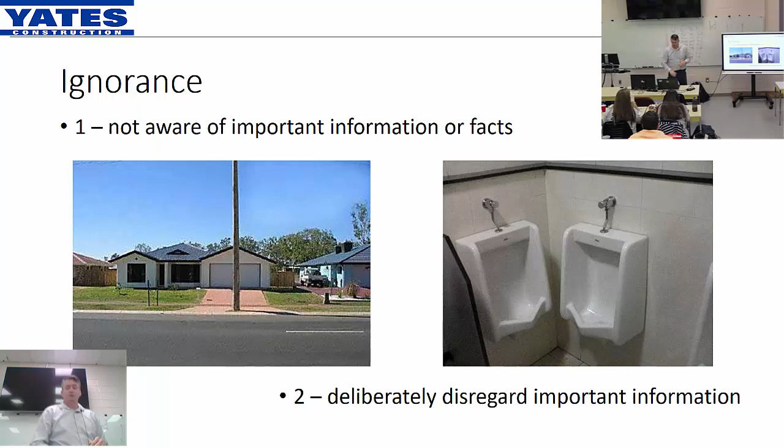Okay, let's go on to the next one. And if it's going to go, twice, alright.

We also have chaos. So what kind of confusion can we have? This simple one, this is a federal prison. Prisons have lots of bars on windows and lots of very strong doors and lots of concrete, things that you cannot break, and it works really, really well. So a little bit of confusion: you have a set of plans that show you a door, window, interior window combination. So then the question is, do the bars go on the inside or the outside of that room?

Anybody want to take a guess at what you think? Outside? So why would they go on the outside of the room? Once again, a little bit of ignorance. I doubt any of you have built a prison before.

So what are the rules? What are we supposed to use to make that decision? In this case, this room was a counselor's office where someone works with the inmates, helping them get ready to go back into society. Because that is where a civilian worker normally is, it is also considered a safe room. If something goes wrong, the door swings shut, it gets locked, and they can sit in there for 24 to 48 hours until the whole riot is taken care of. Bars on the outside is exactly what they want. Well, somebody else thought this was a place you were locking prisoners in, and if that was a room for a prisoner to stay in, then the bars would have been on the inside, like 95% of the rest of the rooms in the building.

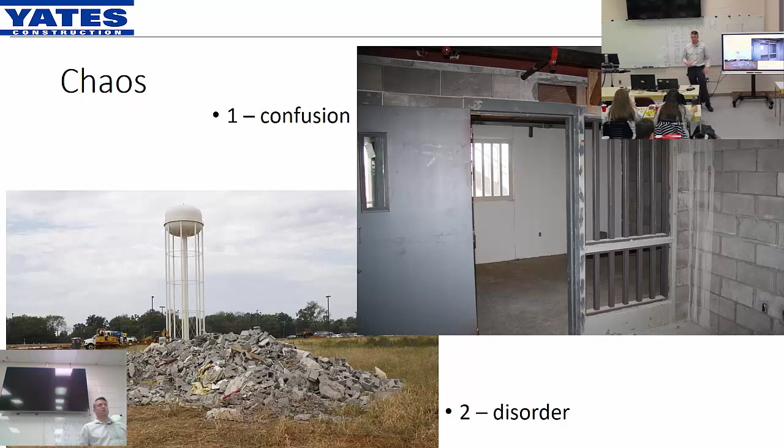It caused the confusion. And then there's general disorder when you end up with chaos on a project and things going on.

What we really want is order and understanding so we can do things like this. Think about that for a minute.

The other things were accidents, mistakes. Does a window get installed slanted like that by mistake? Any of you done any masonry work? That is a lot of very difficult cuts in brick to put that in.

This was somebody's very unique identifying thing they wanted to do with their project. Any of you ever been to Wonderworks? First you see the plans, you'd be like, they're upside down? Because the building's supposed to be upside down, right?

Same sort of thing here. The window is supposed to be tilted. But that takes order, that takes understanding, because we have to convey that information well enough that the mason doing the work doesn't walk up and say, oh, that's messed up, let me fix it. He wouldn't be fixing it, he would be deviating from the specifications.

This is the sort of organization that goes into the Jackson Federal Courthouse in Jackson, Mississippi. That was a 6,600-yard concrete pour. We had 4 concrete pumps, a solid 36 hours of continuous concrete going in place, and the order and organization that has to make that happen.

The biggest issue we had is one of the trucks, as he left the site, went to spin his drum to keep the concrete moving with a little leftover in there, turned the drum the wrong way and left a trail of concrete down the interstate. I still know where some of those piles are, because they didn't come completely off. But that was the biggest hitch, and it wasn't a big deal. We sent somebody behind him with a shovel, and he just scooped it in and cleaned it up. Everything else went nice and smooth.

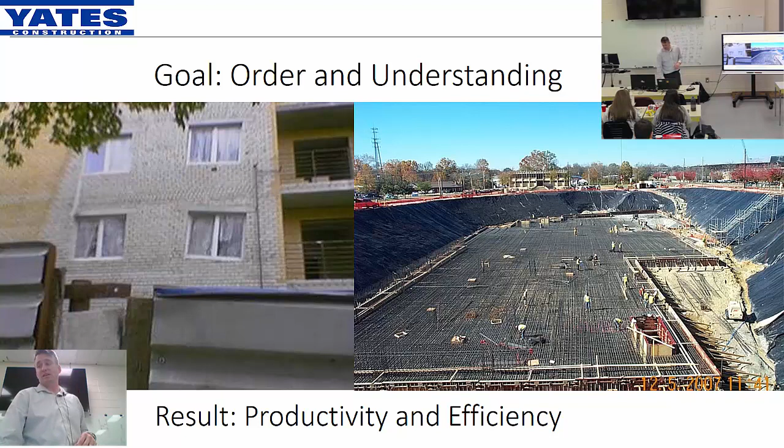So that's the sort of thing we're after on a project, and this is the sort of thing we're building. That's the courthouse, that's that facility. This is the outlet mall there in Pearl. Have you been there? That was a good project to work on as well, I enjoyed that one.

So the idea is BIM starts to build collaboration. Historically, within the design construction industry, this is the relationship everybody had. Architects, engineers, contractors, the owners, they all kind of fought against each other. The contracts were written to be opposing to each other. You're going to see that when you get out there.

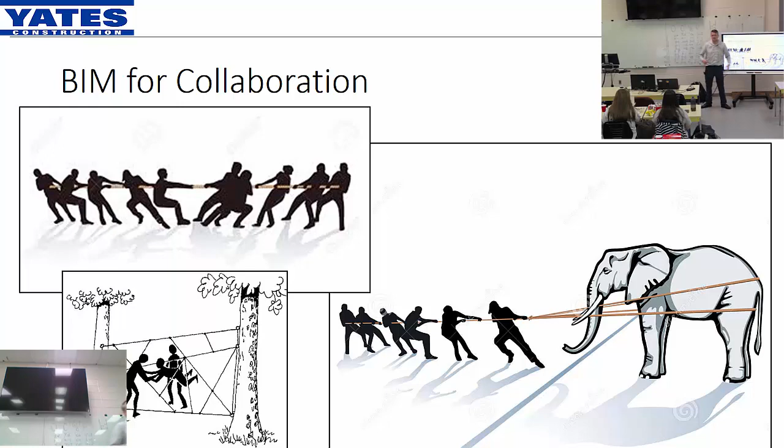One of the things I've done to fight that is whenever a contractor near me starts to tell an architect joke, I just tell them no, we don't need to build that relationship, we don't need to go that direction, we need to be coming together. And when architects start to tell contractor jokes, I say I'm a contractor too, right? Don't make fun of me. We ought to be moving the project, this idea of working together to make things happen.

With that in mind, the core premise behind BIM is: previously, you would do a concept design, and this is what a lot of you are doing in architectural classes now. Then that design would go out, and you'd get plumbing and electrical shop drawings, architectural design, structural shop drawings, and all those things would be created in order to work out the details of building this building, all the sort of things it takes to make sure it really happens.

But the first time it would come together was when it was actually built. That was your first real chance, although you could overlay sheets, right? You could even overlay in CAD, which is the next thing we did to try to make sure it worked, but none of that gave you a true representation.

With BIM, we are actually building that composite model. And that's part of the difference between BIM and virtual design and construction. BIM is the act of creating the model, that's what the software does for you. Virtual design and construction are the steps that take place after that, how do we actually make all this happen.

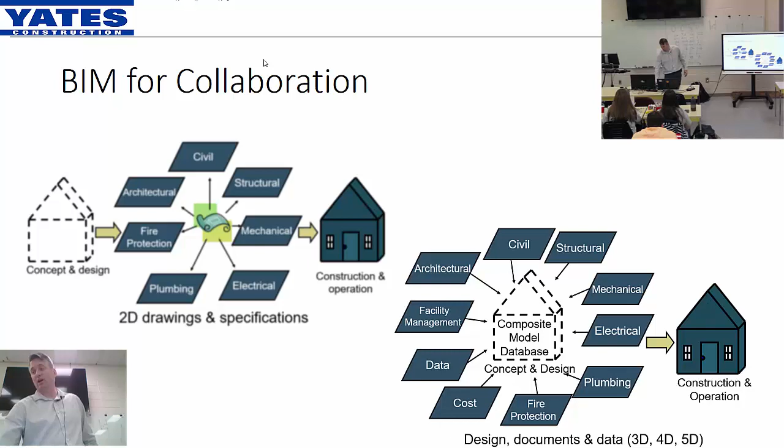If we look at the flow of construction and how it works, you're going to have some contract language that sets the tone for everything you do on your projects. How that contract is written, whether it's design-bid-build or integrated project delivery, makes a huge difference in what takes place on projects.

Then from there, at some point, there's going to be a schematic design, that rough sketch. Generally the principals of architectural firms that have built up their company—and I think all of them I've talked to—say that's what they really love about architecture: that highly creative part where they get to make the building have a feel and a life to it, be inviting and serve its purpose.

This is a lot of work and is very difficult, not easy to do. And to be able to hold that design and that feel as you go, especially when you have an owner who starts saying, 'I've had to cut my budget because of this or that,' it gets very difficult. So you try to maintain that.

Then we roll into the shop drawing and fabrication phase, where the shop drawings have to maintain the design and the engineering. They can't change the requirements that are there. But what they have to do is figure out which pieces and parts they have to put together to make that requirement happen. That's the phase they're in.

And then the most important part is actually getting it all assembled—workers, men and women going out there actually laying a block, or installing conduit like that electrical box back there, or coming in afterwards and putting in a camera mounted up on the back of the room. All of that work—how do we convey all this information through this process to them?

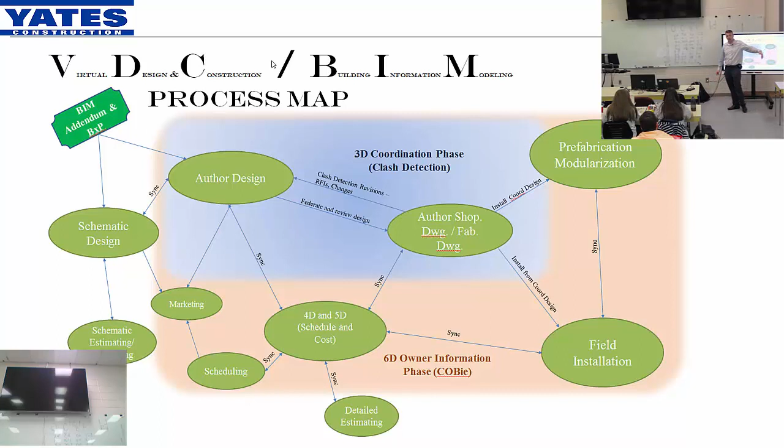And you also have the idea of what takes place in operations. So have any of you taken any LEED classes and explored leadership in energy and environmental design? That's something that focuses on the long-term use of the building and the cost payback there, because if you can reduce the cost of operating, maintaining, and using a building, that allows you more funds up front to improve the building.

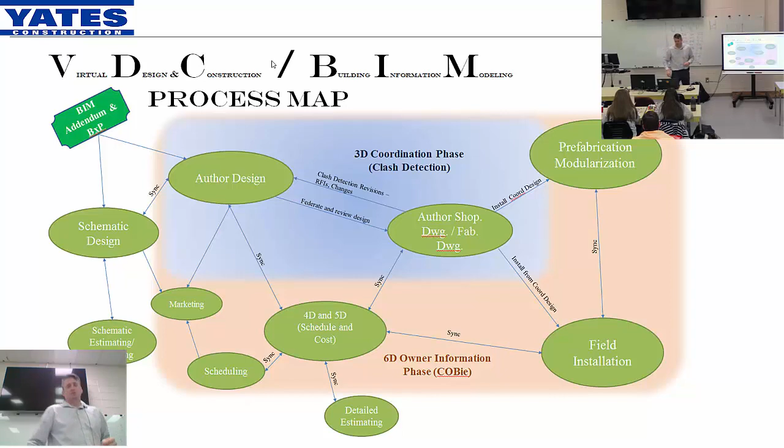So those are the sort of things we're looking at and doing. I'm going to skip a couple. These are two projects we're currently working on. One of those is much more expensive than the other. Want to guess which one's more expensive?

So what makes you think that's more expensive? The shape is very custom, right? It's unique, it's special. But if you start designing architecturally, think about when you do a hotel like this—how many levels do you design here? One or two. What are you going to do there? 42. Right? They're all going to be completely unique and completely different, because even though the dimensions might be the same side to side as this one up here, that's the sort of thing that's allowed.

So what's interesting about these projects is that the design team on neither of these projects is using any elements of BIM or virtual design, and they are having a very rough time.

So why would someone not do that? Well, both firms use BIM and do it all, but both of these projects have been in the works, trying to be built, for like 15 and 20 years—they've been somebody's dream for that long. All of the work was previously done using the greatest technology at the time, which was CAD. But now when it's time to build it, that conversion and rollover doesn't work very well, and it doesn't click. So sometimes even very large projects don't use BIM.

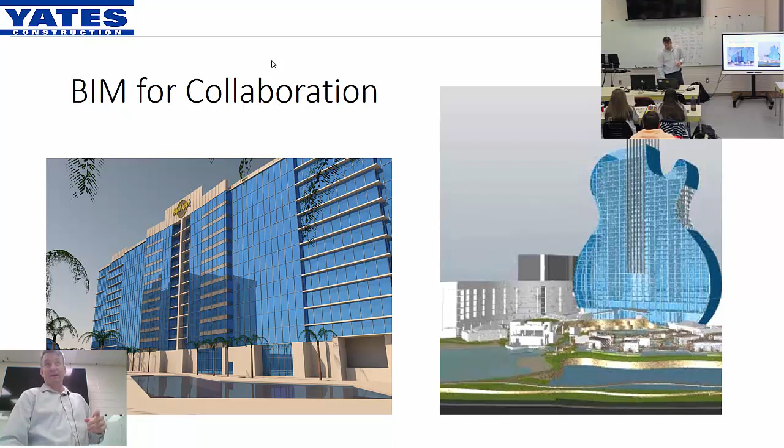So hopefully I answered your question and your question. Let's keep cruising through. Here's an example of something that we do with BIM to avoid ignorance and chaos. This is the Bloomfield Outlet Mall that you saw a picture of earlier, and many of you have probably visited.

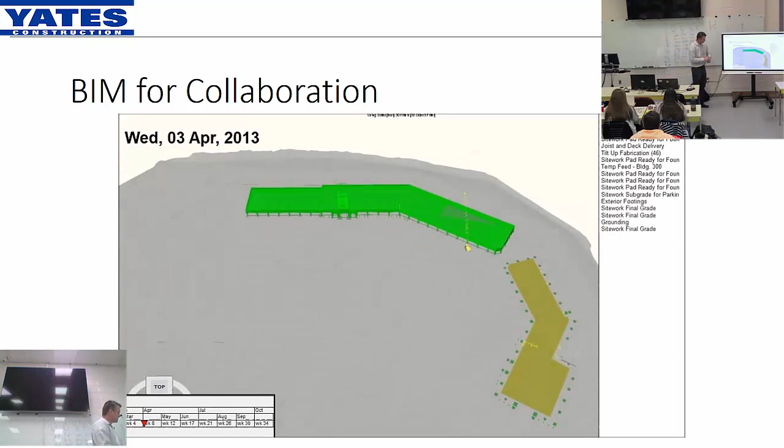This is a 4D schedule. We have taken the elements of the model and tied them in a program called Synchro to the actual construction schedule. You can see the list of activities on the side, and you can see as it's going through, all that stuff is happening and going by really quick. I forgot that I sped this one up, so I talked too long.

Right there it is, okay, right here. Some of you in the back might not be able to see, but we actually saw the project building. I've taken the elements from the models, tied them to the schedule, and now we can actually see the schedule. It's like having a crystal ball.

It's amazing. So I take this crystal ball and I go show it to the superintendent and say, hey, look, I built the schedule. We have this. This was the first one I really did, some like 7 years ago. It would have been April—it would have been 7 years and 2 weeks ago.

And I got all that put together, showed it to the superintendent, and he says, Crosby, you're on schedule, and your BIM stuff is all useless. This is all stupid, this is dumb. There's no way we're going to have 5 cranes on this project. Take all your stuff back and redo it. Okay, thank you, I appreciate your feedback.

As a side note, that's always the appropriate response to feedback you get from somebody, right? Whether they tell you you're an idiot or whatever it is, the appropriate response is thank you. Anyways, we'll get into that later, but thank you very much.

And I said, so what I was doing here, I feel as if we're going to need a crane to set these units. Oh, we're not going to need that big of a crane. Oh, okay, alright, I can change that. My bad, we're good to go there.

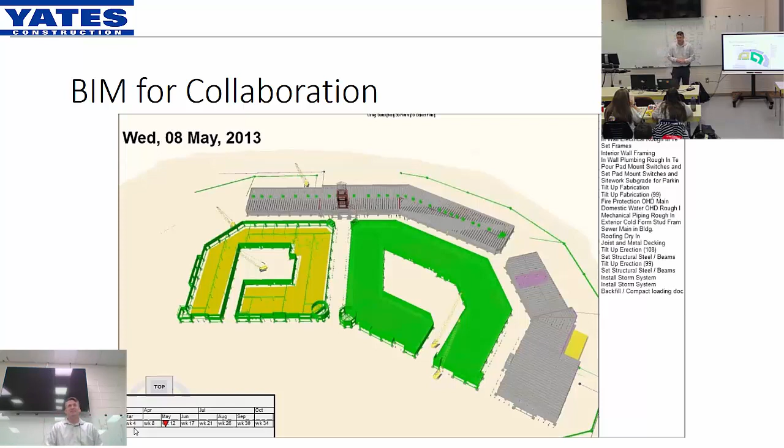What if we're building a new dorm for the university here? What if we built a new dorm for you guys? When does it have to be open? On August. If it's not open by August, what do we do? Somebody's paying to put a bunch of students in hotel rooms. And that's expensive, it might be nicer than the dorm, but anyways. So this is the sort of thing that we're looking at and doing.

Okay, so here's an example of a 4D schedule. This is also, we use the Oculus Rift and virtualization. And so we actually took our 4D schedule, I picked a spot in time, I picked the busiest day on this campus where we'll be building this project. On that busiest day, this road through here looks like an interstate. There is traffic back and forth both directions on that road all day, the entire day, all night. This facility is cranking away. And we're supposed to be building on their busiest day of the year without interrupting their typical business practices.

So this was a screenshot to walk them through that. We've added some safety icons that we help in our training and our orientation, so that way when they're looking at the schedule, they realize we're doing orientation, this is what we're going to be building. We're going to have to be worried about fall protection. We're going to have to be worried about overhead work. We're going to have to be worried about traveling underneath this where there's dirt going back and forth on a conveyor belt. All of those sort of things.

We're overcoming that ignorance and chaos by using visualization that you can see. That image itself was a very significant factor in us winning a very large contract in Tennessee. And so because that is an important scope of work to them.

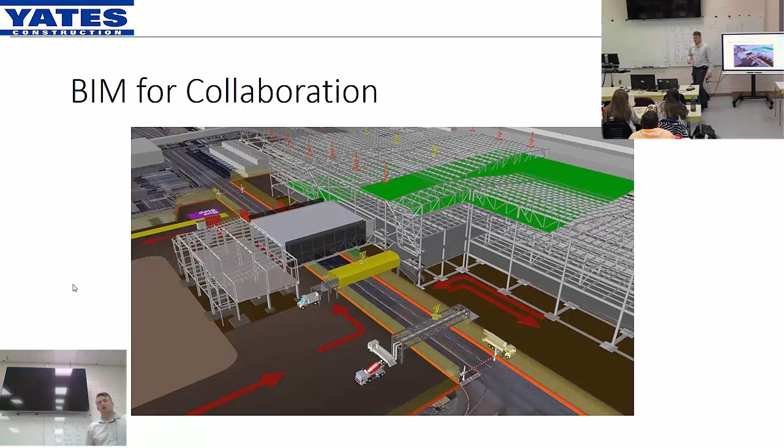And we walked them through the Oculus Rift. They were able to look at it, and they got on the Oculus Rift, and they looked at it, and they said, this isn't high enough. I said, what do you mean? This isn't a typical road, that being at 16 feet doesn't work. We run tower trucks past here that have to have 18 feet to get clear. Good, I want to know that now before someone drives a tower truck underneath it. Alright, and so those are the sort of things that we find and we do. Okay?

This is an example from a Mercedes plant where they build Mercedes Sprinter vans. Our shop drawings came in, and they had been modeling like they're supposed to—the coordination between the structural steel and the bar joist and the interior columns. The bar joist was providing some interior lightweight columns, and what we ended up with was a 7.5-inch difference between the two. We found that virtually before they made the steel order, before they did all that, saving the project 6 weeks of time.

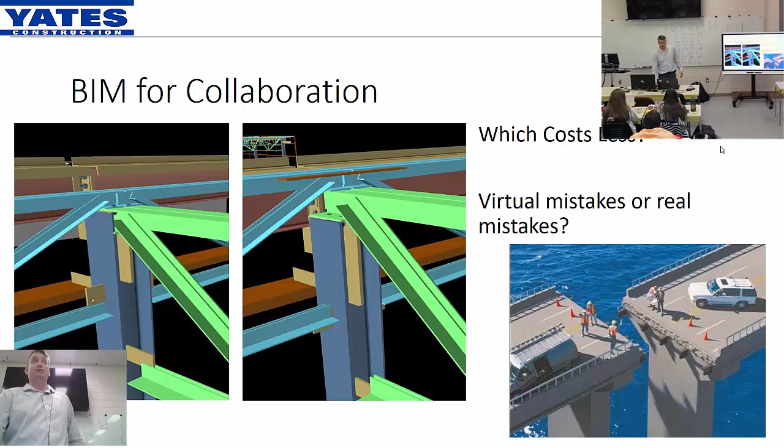Because is it better to find it here? Now, you got to know that's Photoshop. You got to know that never happened—for one thing, I know it never happened because you never have a span that close on two ends of anything, right? But it does get the convenience and the idea across of what can happen and does happen. I mean, I showed you those images at the beginning. That sort of stuff happens all the time.

So the idea is these whole teams have to work together to make this happen. Previously, our contracts have indicated that all of them would work separately and are generally at each other's throats through a project. Now we have to change that because all of these groups are now engaging in teamwork. Some people openly and readily accept that. Some people really don't like that idea. And so we just work with them and we help them through.

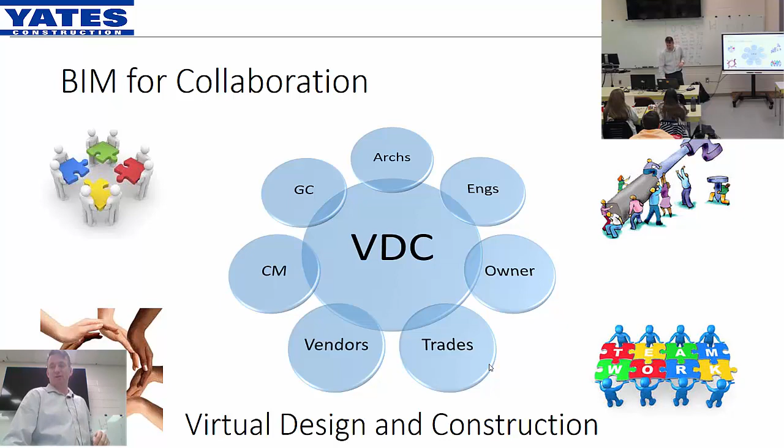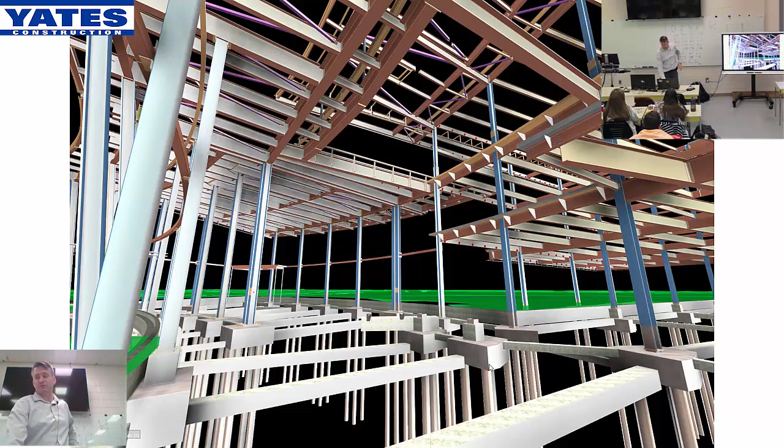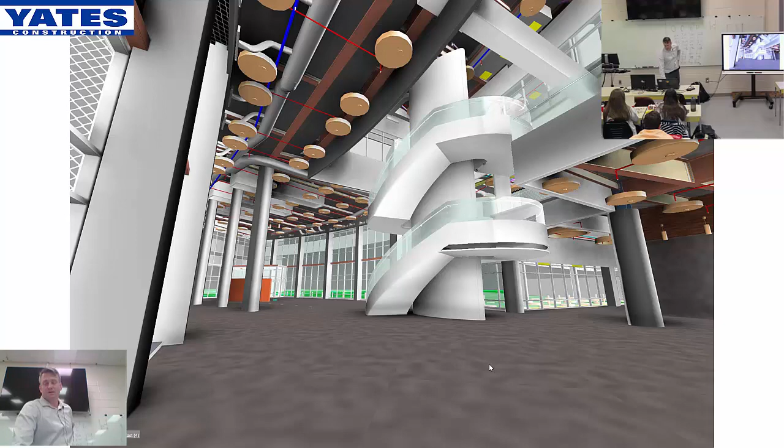Okay, concrete, not a big deal. Custom stair tower, different design. Miscellaneous metals, that's a different fabricator. Okay, our ductwork, fire sprinkler, lighting. Curtain wall, glass, glazing, electrical lighting again, finishes, laser scan.

Whoa, why would we laser scan where we're well into work? So we have a particular contractor that is going to make this tower through the stairs—this glowing tower of light that is absolutely amazing and wonderful to see. But they tell us that to put the fiberglass panels up, they have to have a tolerance of 1/64 of an inch.

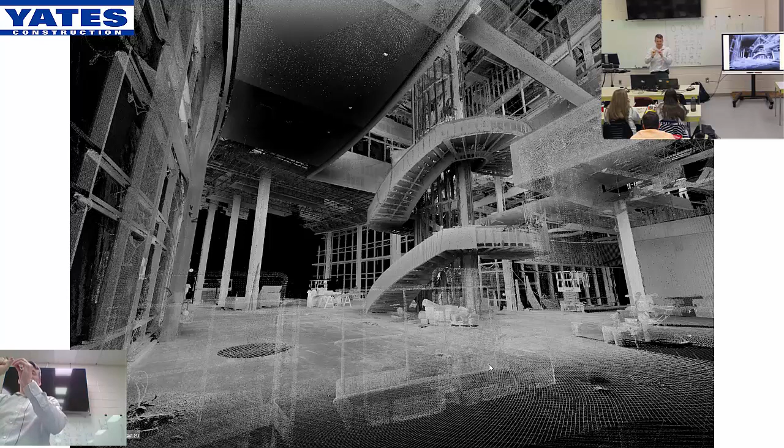Have your classes gotten into tolerances yet? How many of you have done work that know how big a 1/64 of an inch is? It's smaller than that, right? I mean, we're like fingernail, right? When you're doing construction, how do you typically mark where something goes? A tape measure and like a chalk? How big is a piece of chalk? How big a line does a piece of chalk make on the ground? Way bigger than a 1/64, right? How do you actually measure down to a 1/64?

So for one thing, man, that's crazy. But these are custom fiberglass panels—they have to wrap, they can't have any seams. All this stuff has to take place. So how do we get them their 1/64 of an inch? Well, we laser scan it, and we do a high density laser scan, because most laser scans would only get down to like 1/8.

Yes, sir, this is a laser scan of the physical construction on that day. You can see there's a lift there, a JLG lift. There's some boxes of supplies. This circle, that is one of the locations where the laser scanner sat on the ground, and it doesn't scan underneath itself, so it leaves a little hole. There's another one over there, there's another circle there—they're harder to see.

So it reads all around, and then we pull all these models together. It collects all the points from all the different angles, and you get this model that you can walk through, that is accurate down to a 64th of an inch. And we go back to that supplier and say, here is your model, here is how to measure, here is how to know exactly where every bolt hole on those studs are at.

They gave me this deer in headlights look. Red flags went up when they said, ooh, what do we do? I started asking questions and found out that they're fiberglass panels. They make them, get them out, and let them dry, laying them over some bins. I thought, that doesn't sound like 64th of an inch tolerance to me.

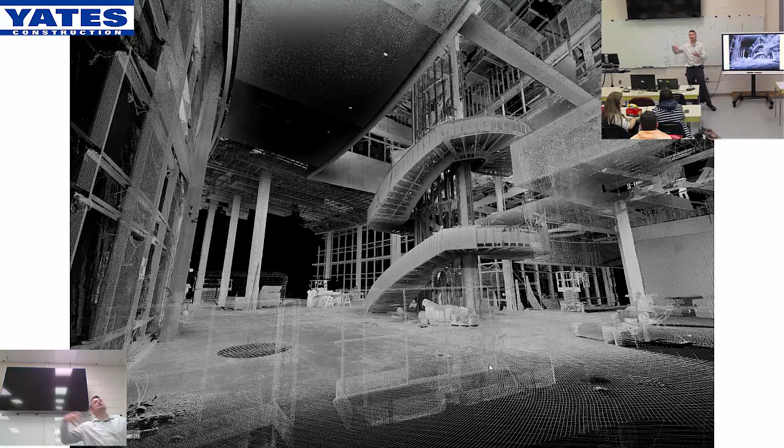What I found out is that those panels are fairly hard to make, but how this company had been doing it is they'd tell everybody a 64th of an inch tolerance. They'd bring their panels out, they didn't fit, they'd say you're out of tolerance, and make the owner pay to fix the panels. We provided a means so the owner did not pay to fix the panels. They had to make the panels, install them, and when they made a mistake, they paid for it. We saved the owner a lot of money. That was a good thing to have happen.

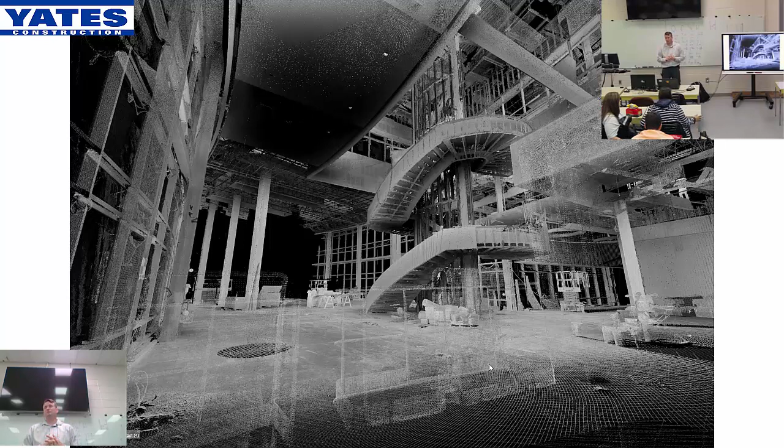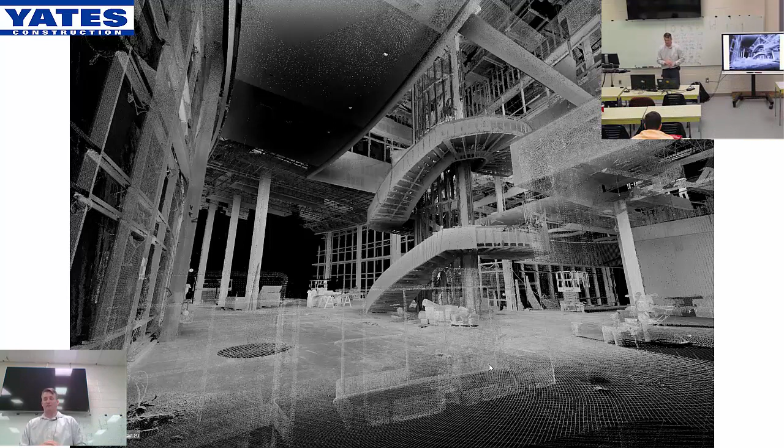For us, that contractor wasn't too pleased with the situation, but they'd been a little devious there, and that's not acceptable. We want people to do better work, be more productive, and do things right for the right reasons. So that's where BIM helped us a little bit.

That's the laser scan and the model. There you are, complete with some of the finishes. And then, of course, there's your tower of lights. It all ended up being quite nice, looking really neat.

The other thing about this that was a big deal, which we don't have the full story for, is that those were some of the first curved LED panels ever produced in the world. They had to do custom displays on them that wrap around the column, and they're pretty neat to see. They did that, and then like two years later, curved TVs suddenly became all the rage.

But anyways, it's really pretty neat. So that's the sort of idea we're talking about. Let's walk through how this happens and what makes BIM work. We start with an architectural design. How many of you have actually produced an architectural design? Okay, that's the starting point.

That's the dream, that's the vision for most projects. Unless it's industrial, like a processing building creating plastic or fiberglass, then nobody cares about the architecture—it's about the mechanics and other things. But anyways, it needs to be model-based, which I think all of you are familiar with since you're all in the classes doing that.

Then we have to do the civil. I've had five projects in the past year and a half where I went out and tried to virtually align the civil and architectural models to see how they sit together, and discovered that nobody knew how they matched up. What kind of consequences does that have in real life? Nobody knew where the building was supposed to go. You really ought to know that, especially before we pour the concrete, because we can't just move the concrete later.

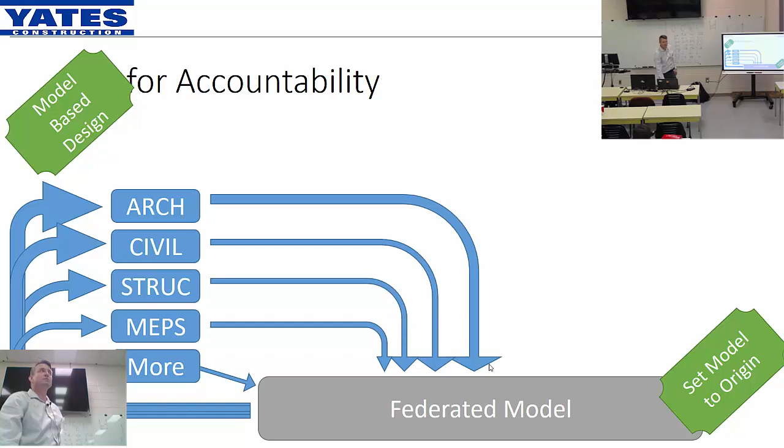Then our structural has to match, along with mechanical, electrical, plumbing, sprinkler systems, whatever else we're going to model—kitchen equipment, CCTV, furnishings. Those all produce the design requirements. They meet the code. They are what has to be built. Then we have to go into the process of how do we actually build it?

Because I'm pretty sure all of you that have created architectural models, did any of you bother to look at where the masonry brick actually sat, or where the block was? Did you look at this joint and say, oh, that's a half joint or a whole joint? What's going on there? Does it intertwine, or are these separate? Is that a control joint there? All of those sorts of things. Usually the architectural team isn't into that. Why not? It's a whole other level of expertise, a whole other career of how to actually make that work.

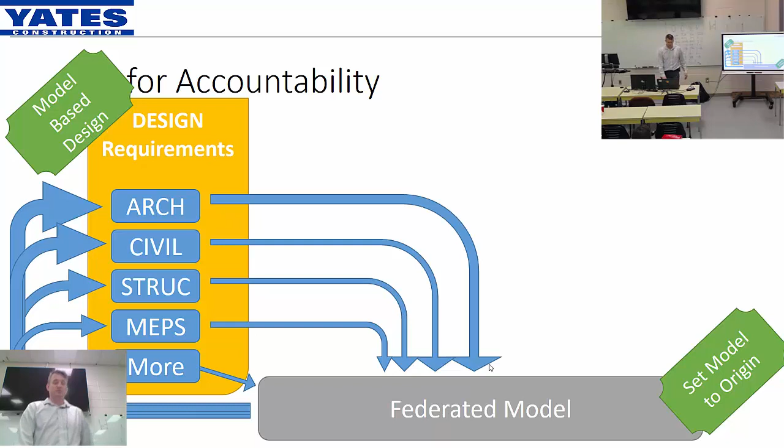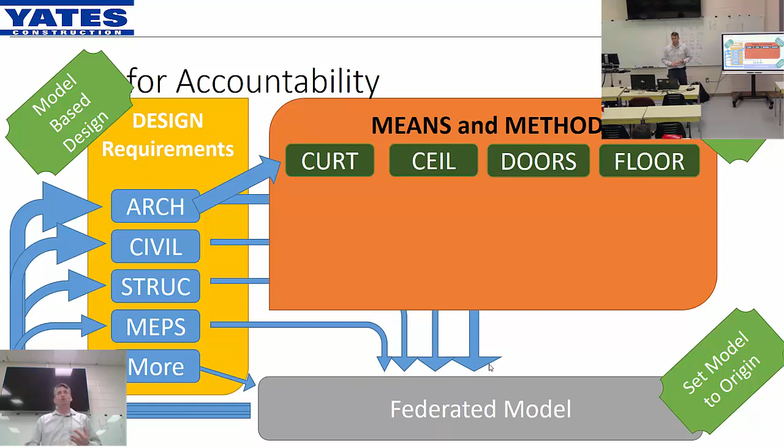So we need shop drawings. Those shop drawings are often referred to as means and methods. We start building those means and methods. We want model-based shop drawings, so now we can overlay these models on each other: architectural, curtain wall, ceiling, doors, flooring. Would we model the flooring in here? It's just paint, we don't really need to model it, right? What's a building where you've seen where you'd have to model the flooring?

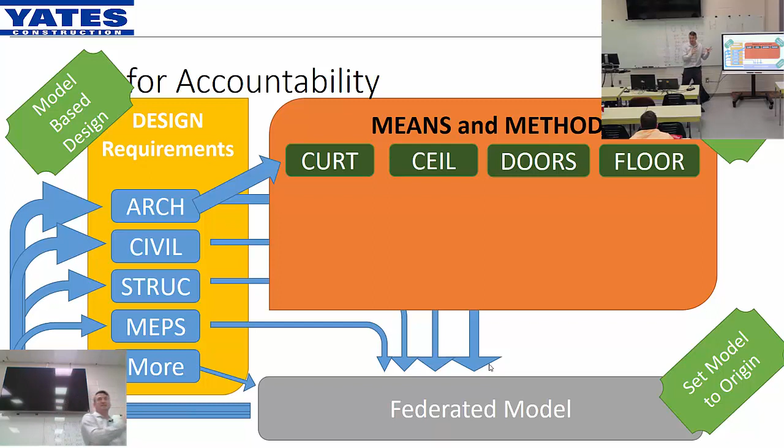A fancy tile floor, if it has a pattern to it, right? You walk into a building and maybe there's a big compass out there with north on it. It's embarrassing if that's not really pointed north, so you want to model it to make sure it works. Any of you visited a casino? Flooring patterns are very significant and important in a casino, right? That's how they keep you at the games, that the floor all points back to the roulette table.

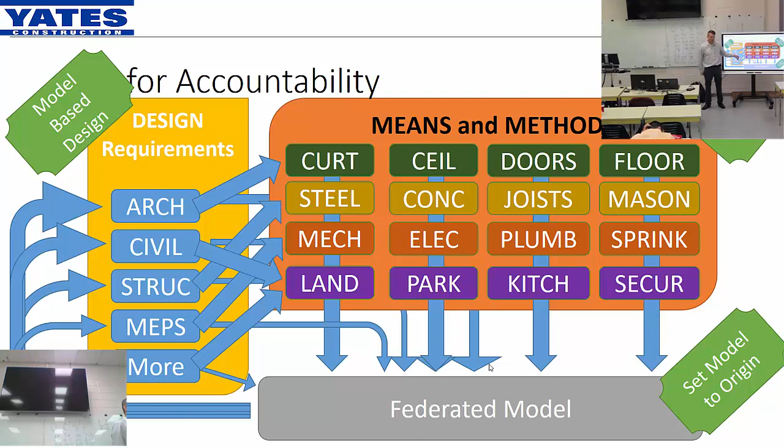Steel, concrete joist, masonry, mechanical, electrical, plumbing, sprinkler - the information is pulled, and you almost have to redo them, right? They can't just take these models because these models don't have the detail, they don't have the level of development that's needed when you get over into here. So all of that comes together and you start bringing them in. Every week you bring in what you have and start coordinating it, running it through this process, making sure it works. If it doesn't fit, you go back up and go through this process in this circle over and over again until you have it completely designed and worked out.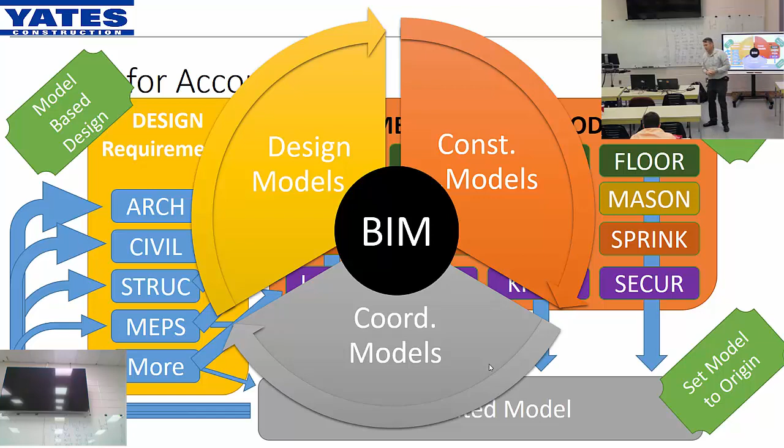With the whole intent that when someone walks out there to start installing things, they know it all fits, it all works, where it goes. Every one of those employees now out there building this building have freed up that much brain power to think about, is the quality of my work correct? Am I actually putting the tile right - not just is the arrow of my compass on the floor looking north, does it actually look good the way it's coming together? Is my conduit actually straight? You look at that electrical panel right back there - if he'd known everything was going to fit, would they have had those crossing over when they did it? No, they would not have. That's an exposed feature, it's there all the time. So there are things we can do that much better as we go through.

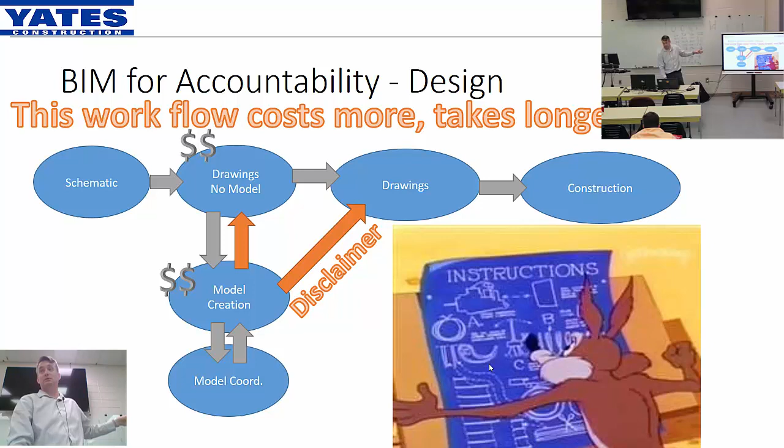So we are pretty much out of time. I walked through this process in the other class. If you do the process wrong, you get a plan about as good as Wile E. Coyote, okay? A little bit better you can do is minion level planning. What I'm after is Batman level planning - I want you to be able to keep the whole world safe through excellent planning. That's what we're after.

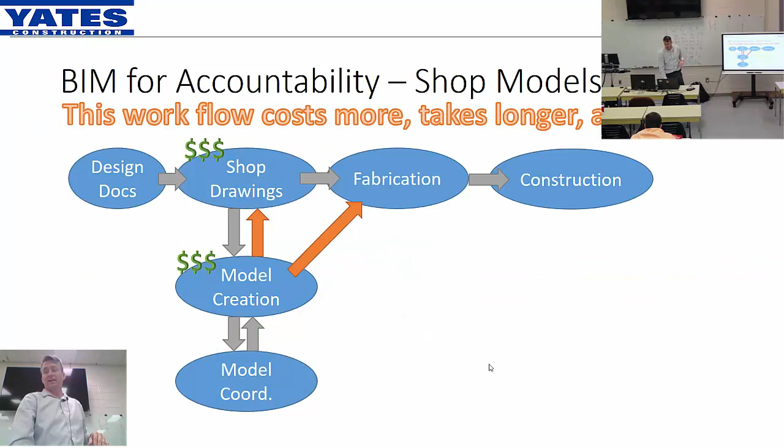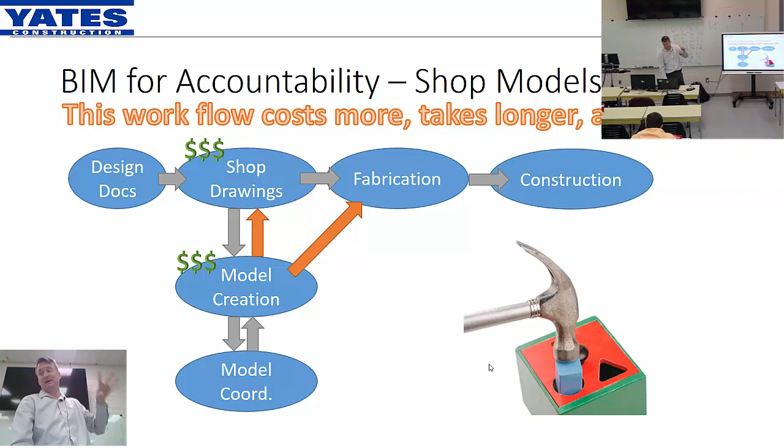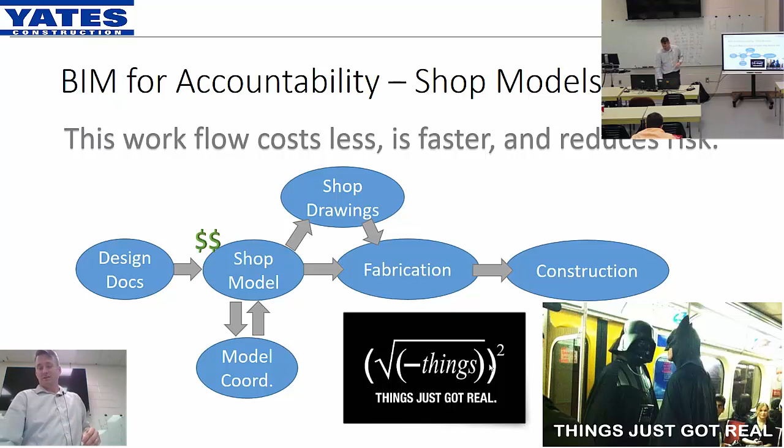Same thing on the contractor side, right? If we're not doing our shop drawings right, we end up with junk like this. It just doesn't work, they just pound it in and you end up with that. If you do it right, things get real - like completely, we are virtually there and we know exactly where things go. So here is a very good example: once again, that same building I showed you earlier. This is the fabrication model.

This is the design model in blue. If you look here, you'll notice there is a very large, nice balcony. Our fabricator had not been told there was a balcony coming. The owner went to the architect and said we want a balcony. The architect added a balcony and told the structural engineer, who added a balcony.

They were producing an ASI that was going to be released the next week. This was a Wednesday, and that ASI was coming to us on Tuesday of the next week. We happened to also be reviewing this on a Wednesday. Notice this, because there was 185 linear feet of glass handrail running about $85 a linear foot - very expensive stuff - that showed up in our glass guy's model.

He was looking at the model, and we were helping get quantities. We had this discrepancy, so we're talking to him, and couldn't figure out what it was. Finally we got down to it - we opened the model, we're looking at it, and there's this whole glass handrail around a balcony. Everyone on the team with me looking at the model was like, where'd the balcony come from? And it was all going to be released to us the next Tuesday.

The significant thing about this was that the order for the structural steel was going in on Friday. If you don't make the steel roll and don't get the order in when everything else is being fabricated, the next date is usually at best 4 weeks, on a regular basis 6 weeks, and I've known of 10 weeks where you had to wait to get the rest of your steel. It would have delayed the whole course of the project.

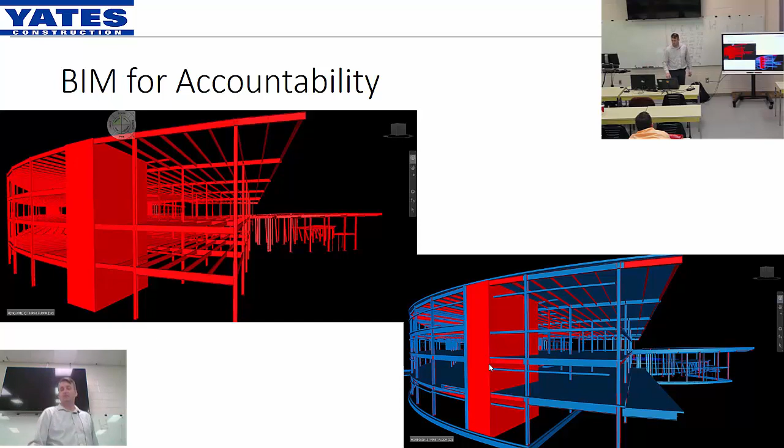So those are the sort of things that we find. I'm not going to tell all the stories about that, but I do want you to walk away from this and keep this in mind with all the new technologies - drones, whatever it is, all this stuff coming out there, right? Uber cars that drive themselves. It's going to change so much faster than it's ever changed before.

I think about my father, who remembers getting indoor plumbing in his home, and remembers getting a generator with electricity and all that stuff, to now. I think about him having the difficulty he has with a smartphone - he just wants to be able to dial, okay? He doesn't need all that other functionality. He doesn't want all the other functionality.

And me, as a younger person, I have a tendency to get a little frustrated sometimes - why don't you just... Well, my dad knows a whole lot more about his line of work and what he does than I will ever be able to know. He spent his efforts learning something different. I think about that, okay?

Then I think about how much it's going to change for me over the next 40 years, and what changes I'm going to see by the time I'm 82. You start to think about what this world might look like when you're 82 - you will not be able to keep up either. So don't think that because you're up to speed on this technology, you know how to navigate social media, all those things, that you know more than that principal of the architectural firm you're going to go work for.

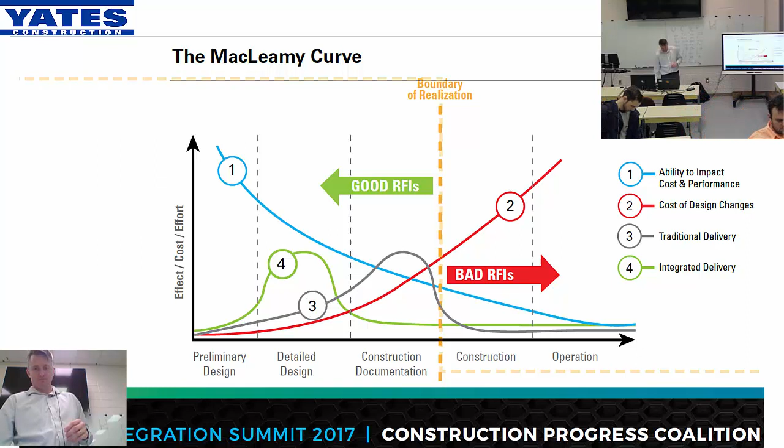You didn't push record? There was something wrong with the computer, but I got it in the camera. Okay, well that's good that you have it in the camera. We'll have to figure out how to exchange files, Dropbox or something. I'm quite curious to see. Here it is, it got it.